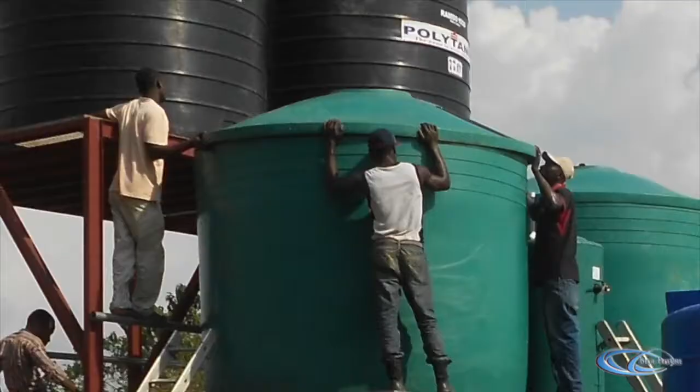I already knew a fair amount about water and water treatment when I started grad school in 1989. I got into a pretty unique engineering program at Humboldt State called International Development Technology, and a lot of people that were in that program were Peace Corps people. And so I really learned in that year or 2 years that I was in that about,

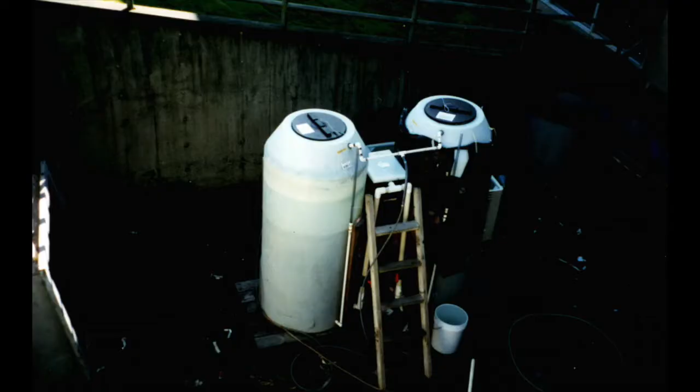besides water testing, water engineering issues, but also I learned a lot about what makes projects sustainable and what makes them fail. Because places like Africa are filled with well-intentioned, well-meaning, expensive water treatment projects that failed because they didn't have the support one way or another. Either there was no technical support locally, there was no money locally, they required chemicals that couldn't be found locally. Those kinds of issues.

We have sound designs that we've used for 20 years now, and we build to those, and sometimes we tweak them, sometimes we change them, but anytime somebody buys one of our filters, it's based on 20 years experience with that design. And that brings the cost down and makes it reliable and makes it easy to plug in, because people just need to tell us how much water they need, and we just provide it at the size that we have that fits that.

So sustainability for us in a technology choice is extremely important, and sustainability doesn't just mean something that can be operated for a long time. It means that it can be operated in an appropriate manner to the people who are going to be using it and maintaining it. And that means that before you even choose a technology, you have to look at the community of the people who are going to be using it and maintaining it to see what sort of resources they have.

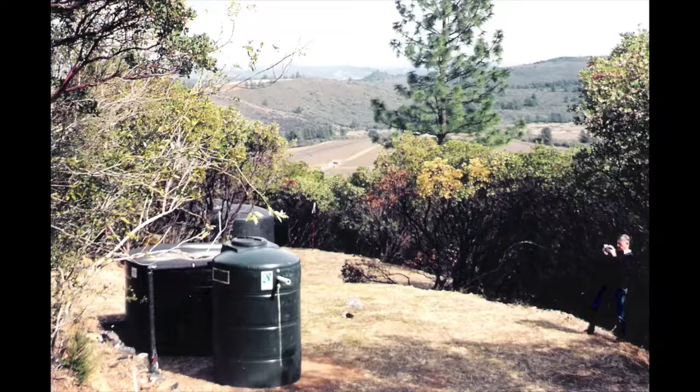The international experience that we have translates very well to developing countries, developed countries too. For instance, the United States and Europe, where there's a lot of rural communities who don't have the means to operate or maintain sophisticated water treatment systems. So they can use ours, which is one of the reasons why the U.S. EPA has identified slow sand filtration as one of the 4 approved technologies, because it totally fits with a lot of rural communities, state parks, national parks, small communities, trailer parks, a lot of rural applications in the U.S.

I'm Peter Blackburn, Vice President for Operations at Blue Future Filters. And I'm standing here in front of one of our SSF-10 slow sand filtration units being used to treat rainwater, in this case, to drinking water standards. And one of the big challenges with the water crisis, of course, is having enough accessible, usable water. And one of the solutions is, of course, rainwater treatment. And so that's what we're doing right here, making that accessible.

What's great about this system is that it's replacing what would otherwise be a highly engineered system with a long lead time for any community that wants to implement water treatment. And that's true in the United States and Australia, as true as it is in Thailand, where we've worked, or Indonesia, or in Latin America.

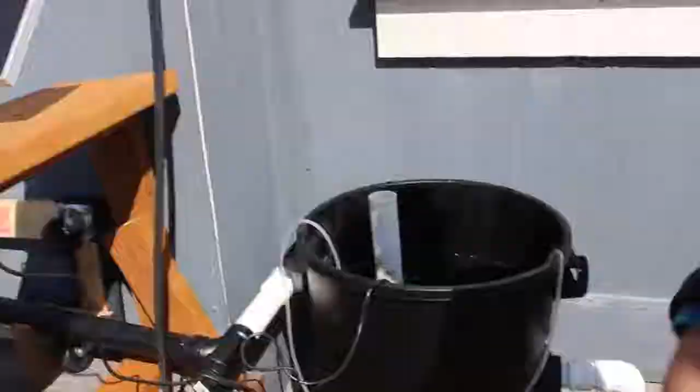When we're trying to find a solution to a specific water treatment problem, we do a fair amount of research and development to test out our ideas and to find the best solutions. So in this case, that's exactly what we're doing here. This is a test gray water treatment system and water reuse system that we've developed here.

Our aeration system is actually powered with a very compact solar unit. And increasingly that's a component in sustainability from our perspective, is using readily available power, where you won't have to tap into the grid.

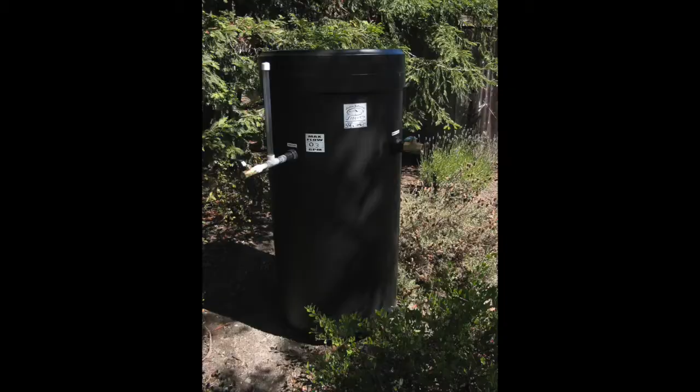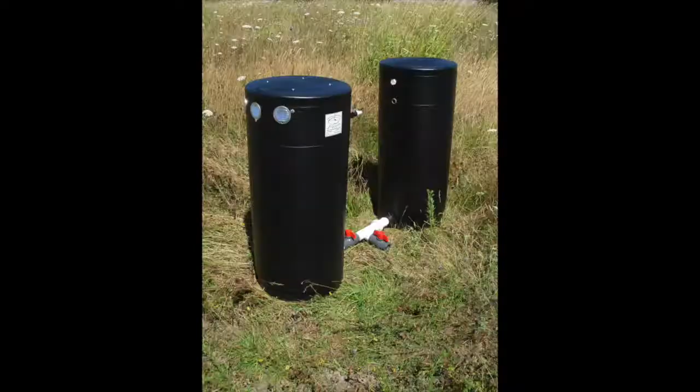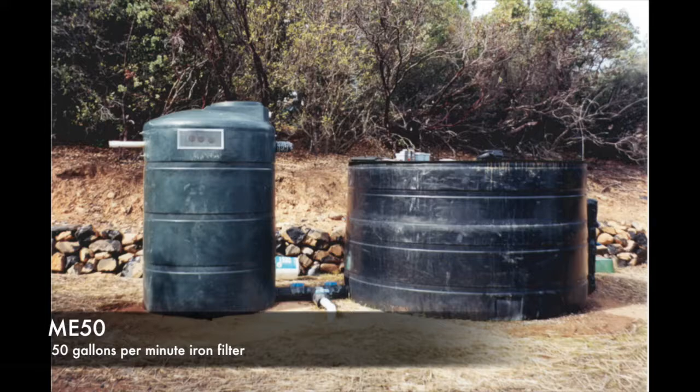So we have slow sand filters, 6 basic models in poly tanks, a 450 gallon a day, 1800, and then 1.25 GPM, 3 GPM, 6 GPM, and 10 GPM slow sand filters. For iron filters in the poly series, we have a small one in FEX, which will do about 1800 a day. The ME4, which is a residential one also, but it'll do about 5,000 gallons a day. And then the 2 larger, more commercial units, the ME25 and the ME50, which do 25 GPM and 50 GPM respectively.

We have roughing filters, which are pre-treatment, basically for the slow sand filters, for anybody that wants to really take down algae and turbidity and that kind of thing. We have an RFX and an RF1 and an RF25. The RFX does about 1,000 gallons a day. The 1 does about 1,800. The 25 does about 25 GPM.

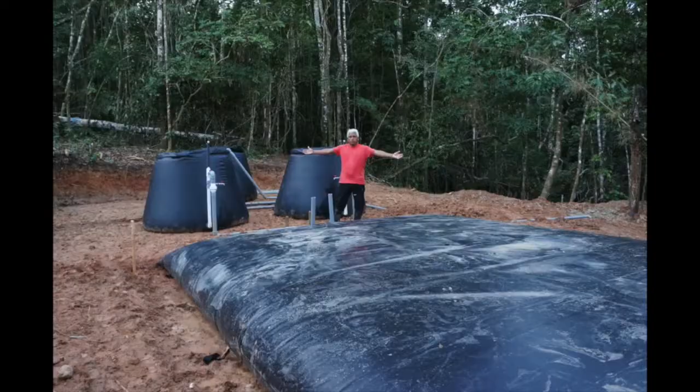And then we have a small rainwater filter, which just takes water from the gutters and treats it in a cursory way before treatment from a slow sand filter. And then we have the Reflex series of filters, which are the geomembrane based filters, which we can ship anywhere. They come in a box and you basically unfold them and fill them with media and they're ready to go.

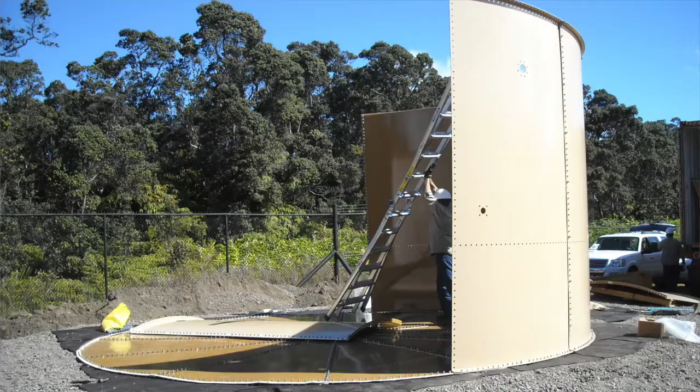And then the large steel tank systems, of which we have slow sand filters up to 1,000 GPM and iron filters in high volumes, and some specialized filters like the ones that we have done for coal bed methane treatment, which are basically our iron filter with some added features.

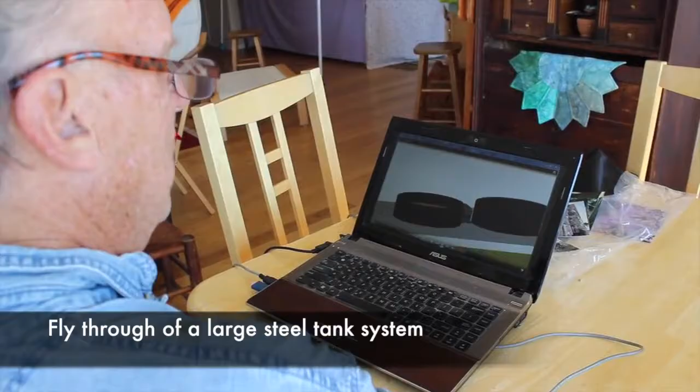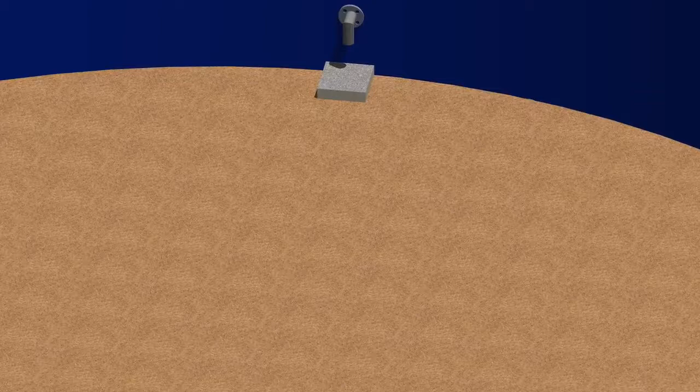This is a 200 gallon per minute slow sand filter that we designed and is now installed in Kenwood, Oklahoma. Looking down from above, you can see the sand in the filter. That center pipe coming up in the middle there is for cleaning purposes. And you can see the sand, media, and then in the upper part is the inlet structure. So the water comes in through that pipe and splashes on that concrete block, so it doesn't just dig a hole in the sand.

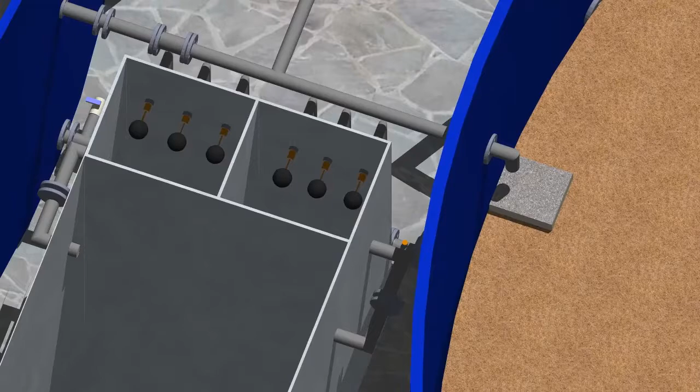And looking up, we're going to come across over to the weir tank, which controls the flow for the filter. And back around to the front so we can see the valving controls the water coming out of the 2 tanks and coming up into the weir tank. Now looking over into the piping, you can see the under drain piping, which collects the filtered water, and the harrowing valve.

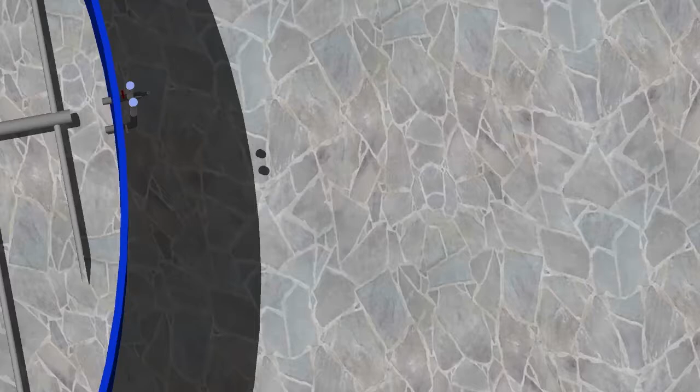And then coming back over the top, we're going to see the piezometer tubes and the sight tubes, which is how you know when to clean the filter. And the 2 clear tubes will tell you the difference in water height, and those 2 tubes tell you what's going on with the filter when you need to clean it.

We supply solutions that can be operated by somebody or a community long term without ever buying another thing from us. But we figure that the world's a really big place. There's billions of people and there's millions of people that don't have water. So I think we've got a pretty unlimited market.